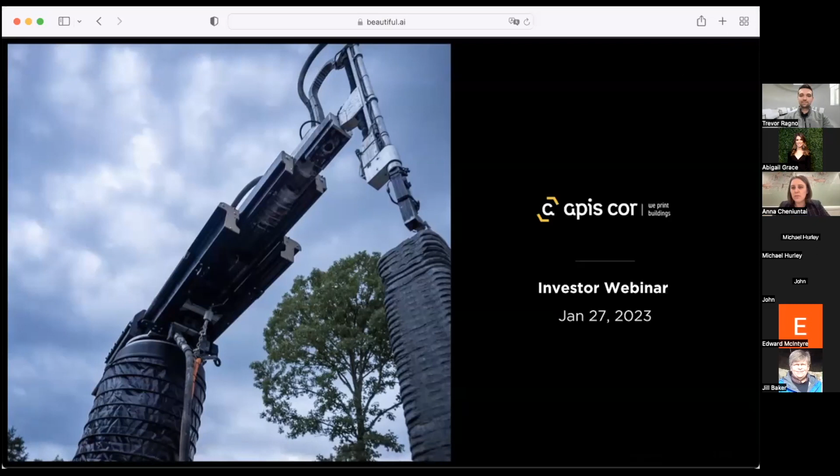So Trevor, do you see my screen? Everything is okay? Yes. Perfect.

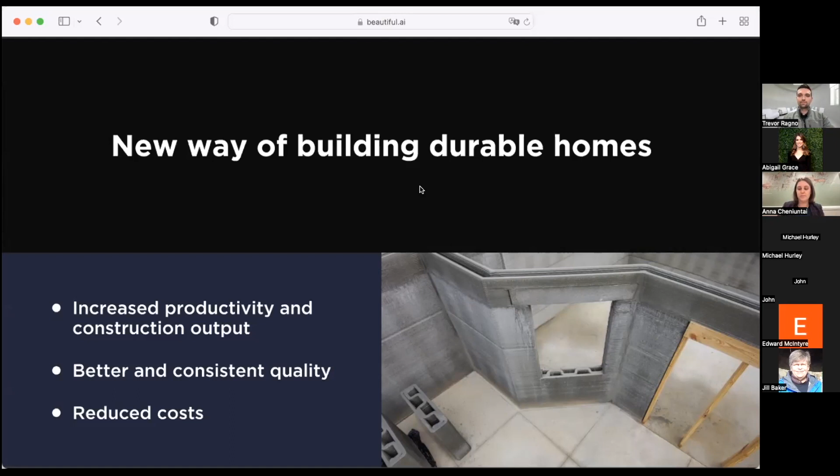So now really quickly about the robots that we have. Frank is the printer. Frank is mobile and portable and very easy to transport. And you can see that it's pretty compact. When we say compact, it's not something you can put in your purse, for example. It's really compact compared to the human size, because other companies and other printers are huge. Compared to them, we are really compact.

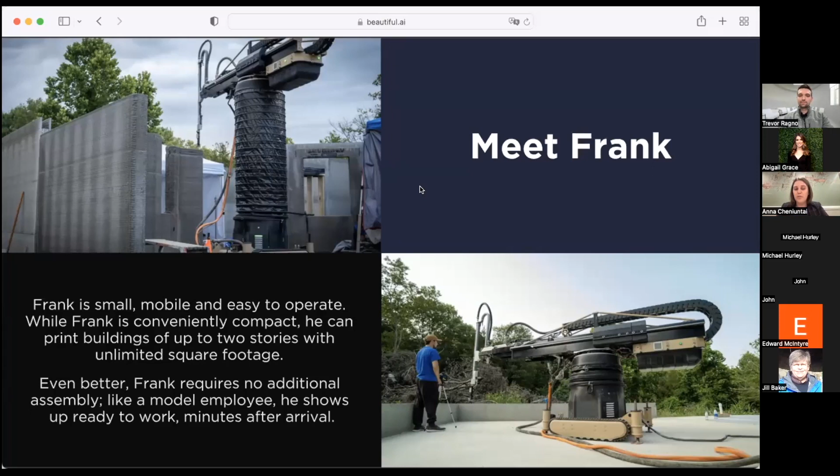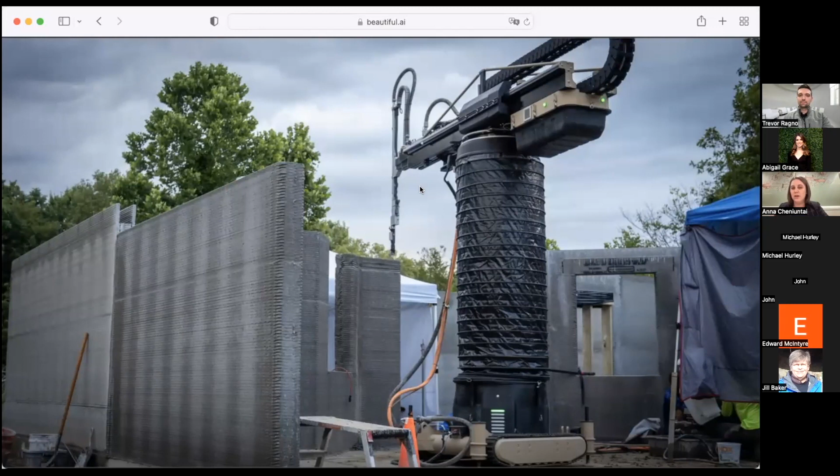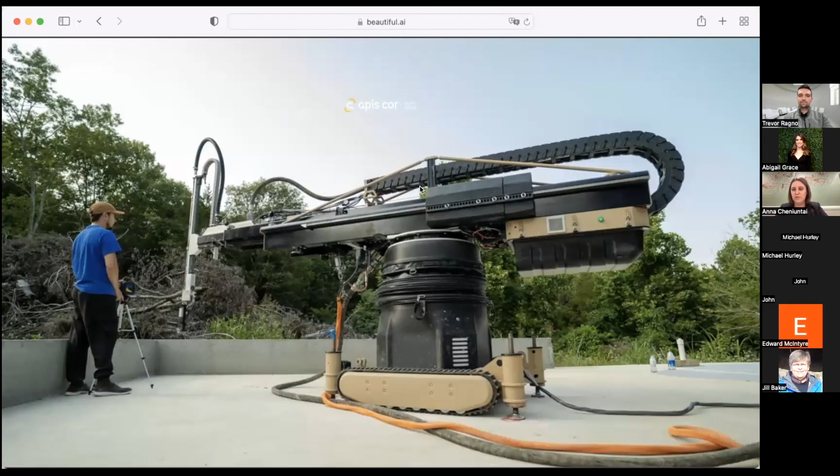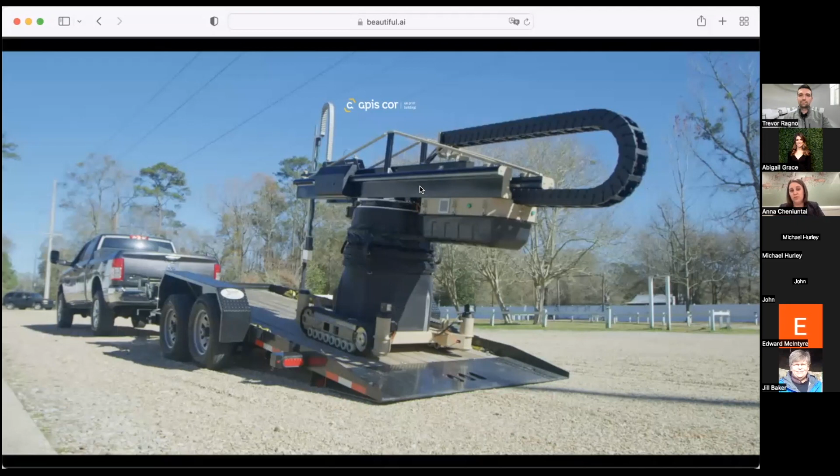Frank can print up to 2 floors. This is how you see he's finishing the walls of the first floor. You can see the quality, you can see how it lifts up. This is how it compares to the operator. It's actually Nikita Cheniuntai, the inventor, CTO and co-founder of the machine, on one of our construction projects. This is what we mean saying that it's very easy to transport. So Frank actually can fit on a flatbed trailer.

And how we can 3D print 2-story. Hypothetically, we can 3D print 3 floors, but now we have only tested 2 floors. So, for example, the same as we did in Dubai. We installed the precast slabs, and then we put the printer using a crane on the second floor, and we continued printing the walls of the second floor. However, the walls were very tall. They were 4.5 meters tall, much higher than the printer can print when stationary.

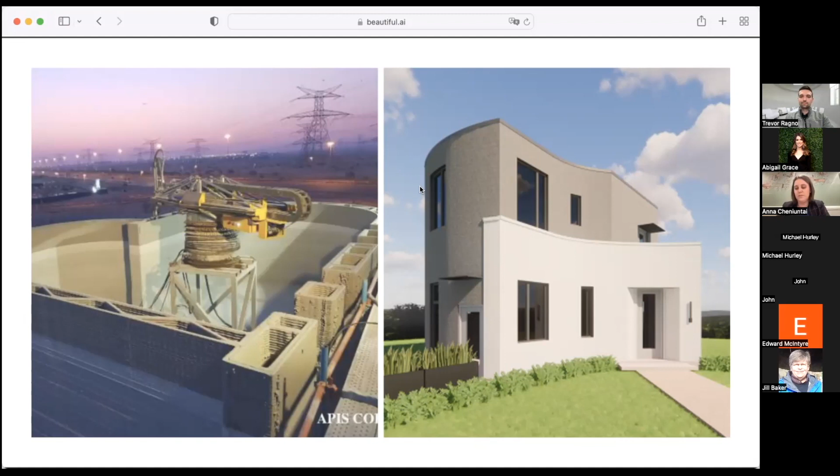So here on the left, you see that we put the printer on a very simple metal frame pedestal, and this is how we extended the printing height to 4.5 meters. And we can do the same for the house that you see on the right. As an alternative way, we 3D print the entire height using the metal frame, and then we install the wood joists as the slabs between the floors. Frank is also very compact. It's designed to go through doorways. So when you complete printing a house, Frank just drives through the doorways.

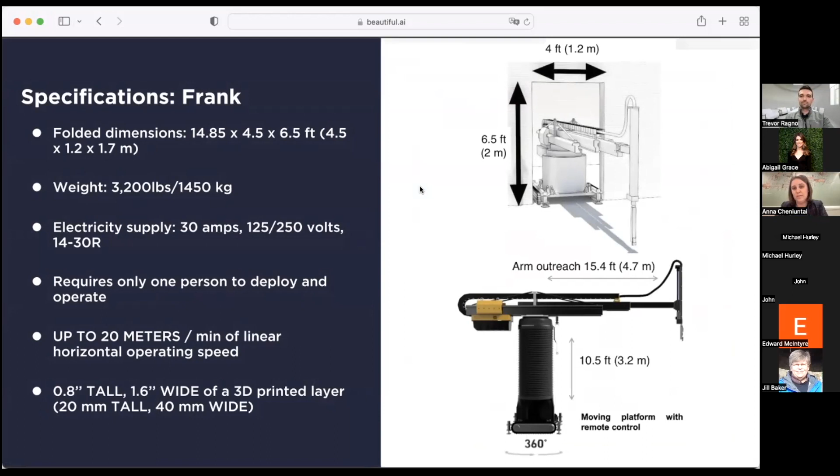About the material: the material we use, we developed it from scratch. It's a special concrete mortar that consists of about 90% cement and sand, and about 10% special components and accelerators that make the material extrudable, durable and suitable for 3D printing. And the magic, or the secret sauce, is what exact components you use and the ratio between them. It's basically the recipe of the material. We spent years to crack the code for the perfect and really advanced material. We're really proud of it.

And the quality of our material also allows us to print walls with exceptional quality. But again, all of the components that we use are not toxic, not fancy or prohibited. We use components and accelerators that are already used in the concrete industry. Again, the proprietary part is what exact components you use and how much you need in your recipe to achieve the best result and extrudability.

So now Gary is a little brother of Frank, and it's our proprietary piece of equipment. It's a mixer and pump machine that mixes the dry 3D print material with water and then sends it to Frank.

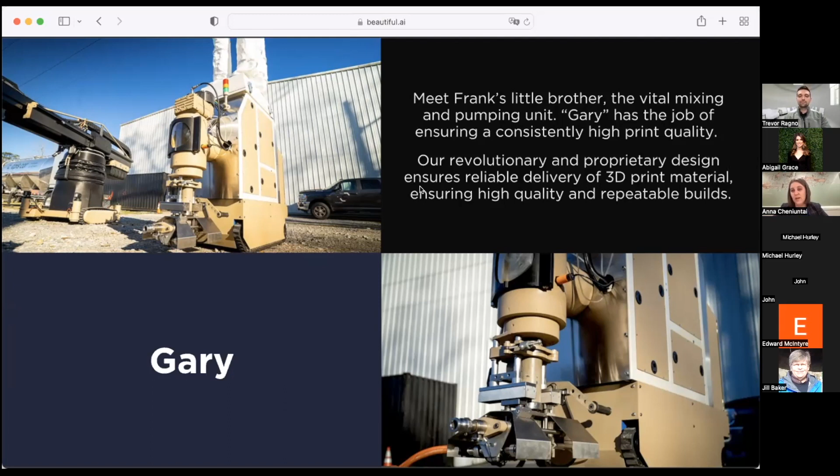Gary was designed after our experience in Dubai when we used the standard existing plastering machine. That was a nightmare. We realized that it's not the way to continue this technology. We have to create this specialized mixer machine for that, because there wasn't any solution for the 3D printing technology. Material is really sticky, and it's a different material that we use. So we had a lot of clogging, a lot of problems on the Dubai project, but we completed that project. And that experience showed us that, yes, we need to create a proprietary mixer if we want to make this technology really scalable and make our customers happier when they use it.

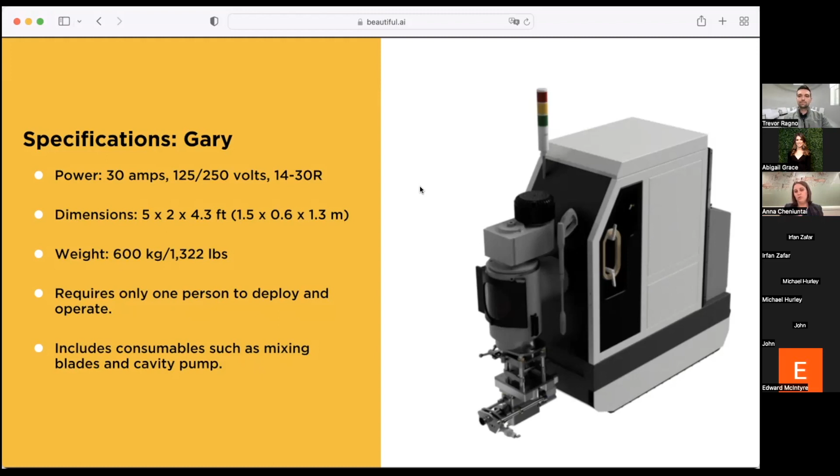And the last member of our 3D printing family is Mary. Mary is a trailer that transports the 3D print material. 3D print material is a dry mortar. It comes to the construction site in a dry form. Then you plug in all of the hoses to Gary. Gary mixes it with water and immediately sends it to the printer to extrude. Mary is a pretty standard piece of equipment. We redesigned it a little bit for our purposes. Here you see Nick, CTO and inventor again, on the way to inspect the material inside the Mary.

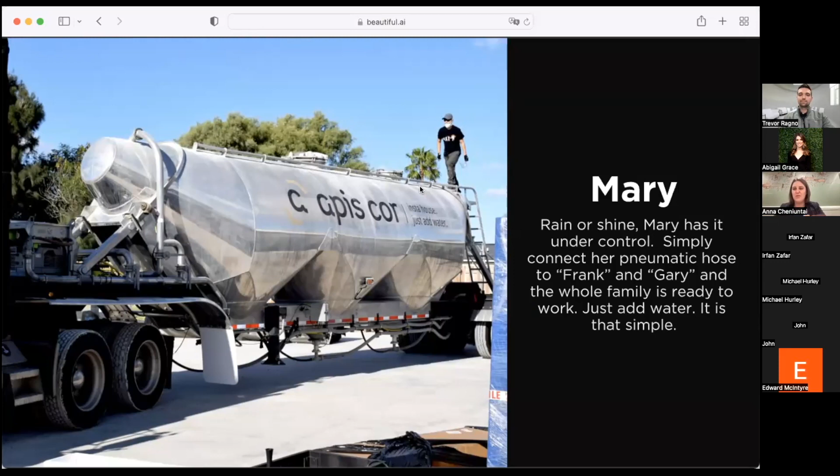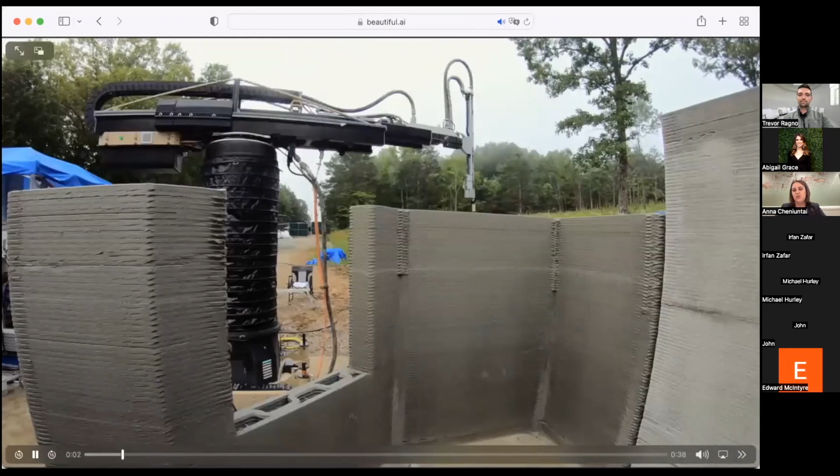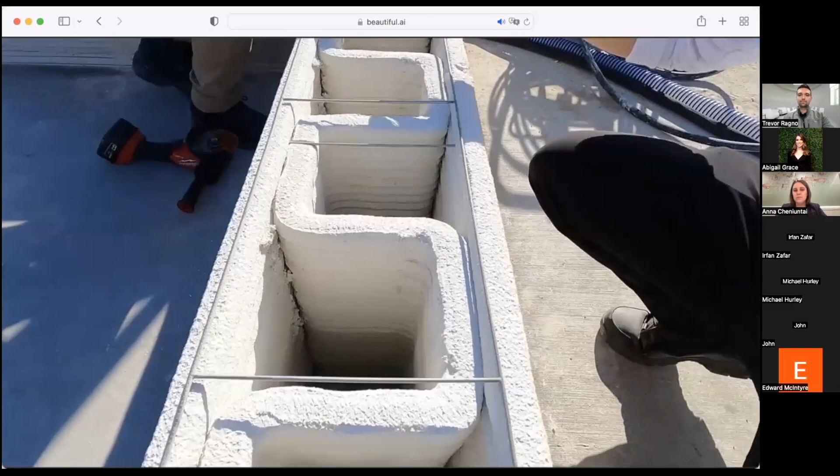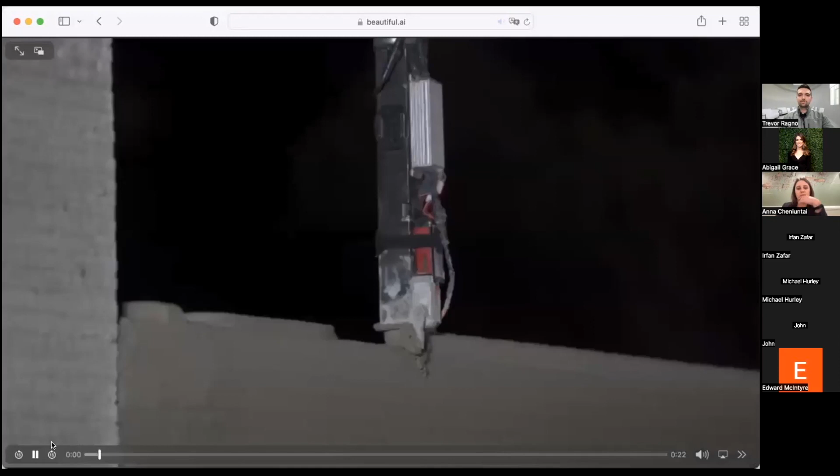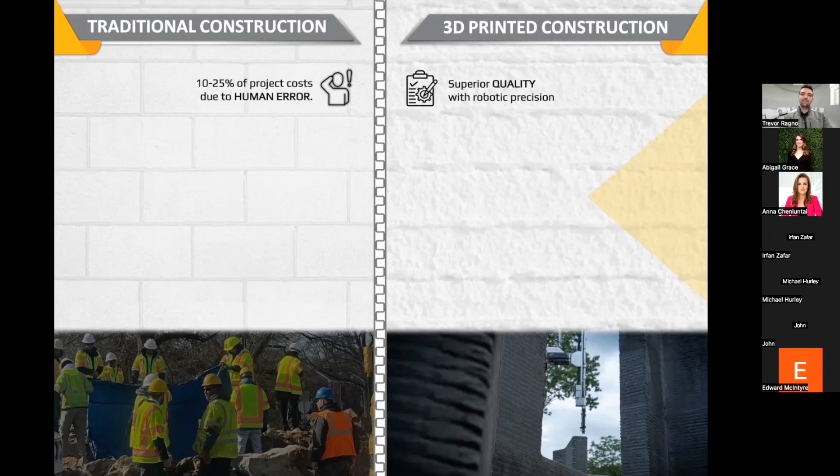Thanks, Anna. Yeah, my name is Trevor Ragno. I'm the Director of Construction and Building Technologies, and my background's really in the commercial real estate and development space. I've developed office, retail, multifamily, self-storage, even data centers. And in that process, you tend to see a lot of the common issues found on the construction site. When you compare traditional construction to 3D construction, it's really common to see human errors on the job site, and those carry costs with them: some of the materials and time spent doing work that needs to be replaced. And with a robot, you really are able to follow the plans to a T. That level of quality really helps reduce human error and the unforeseen costs that might happen on the job site.

Also, you see wood homes all over the place, but as somebody who is building or selling a house to someone, you really want to make sure it can withstand the test of time. And when you're building with materials that are flammable and very prone to moisture infiltration, mold, mildew, rotting, and even things like termites, those homes are not really built to last for generations. It's not like concrete, which is fire resistant, moisture resistant, and also really, really strong. These are all great things in a place like Florida, where our company's based, where we have things like hurricanes and big flood events.

Also, in the construction industry, you always hear about delays. Anna mentioned earlier that the average home right now, U.S. Census Bureau says it takes about 7.3 months to build a typical residential house. If that's a custom home, it's up a little over a year, 12.3 months. Right now, the median delay that's seen on these construction sites is a little over 200 days.

Now, one, a 3D printer is obviously much faster than a typical block crew, but also, and just as importantly, before you ever make it out to the construction site, you know down to the minute how long that printer is going to have to run to complete the walls of the home. So that allows you to not only act more quickly, but also have a little better control over the scheduling process.

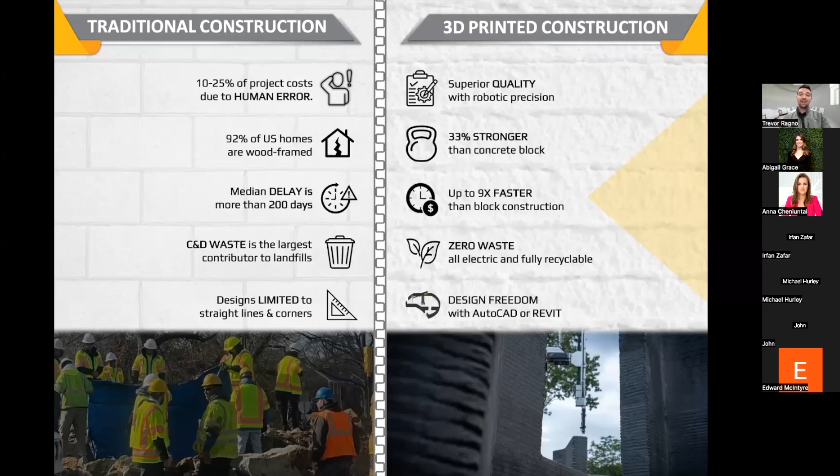It's normally much more expensive to build, let's say, a curved wall. But with a printer, it costs just as much as building a straight wall with hard corners. In fact, it might even be a little bit more affordable because you're literally cutting the corner. So now that we've covered the bases on why 3D printed construction in the first place, let me show you a little bit of Frank here.

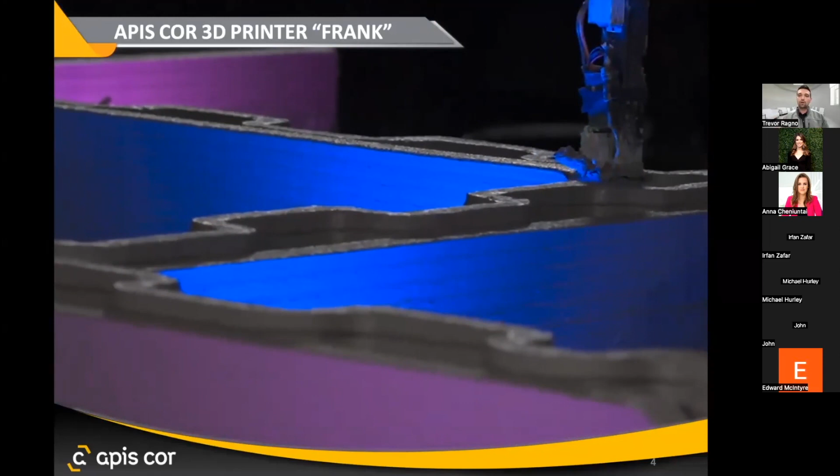I know Anna covered this pretty well, and we talk about these nice sweeping corners, but we can also make very precise and sharp corners with this machine, thanks to this smoothing spatula we have on the outside. We've talked about printing buildings in multiple sections, and being able to do that with good, smooth, consistent quality, there's really a lot of advantages to that we'll touch on in just a minute.

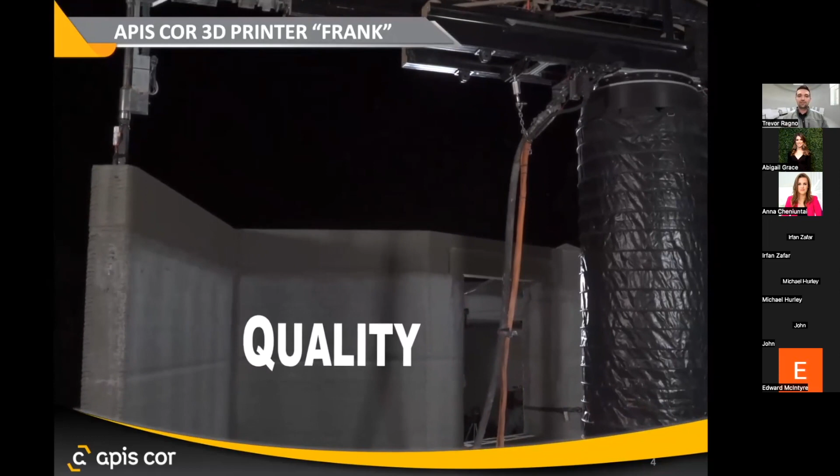So between the different types of printers out there, there's robotic arms and a few others, but the biggest category of printer that you see, besides the Apis Cor printer, are these gantry printers. If you aren't familiar, they're essentially like a CNC machine that's just scaled up, or like a desktop printer that's normally used for plastic, but put on steroids and made absolutely massive.

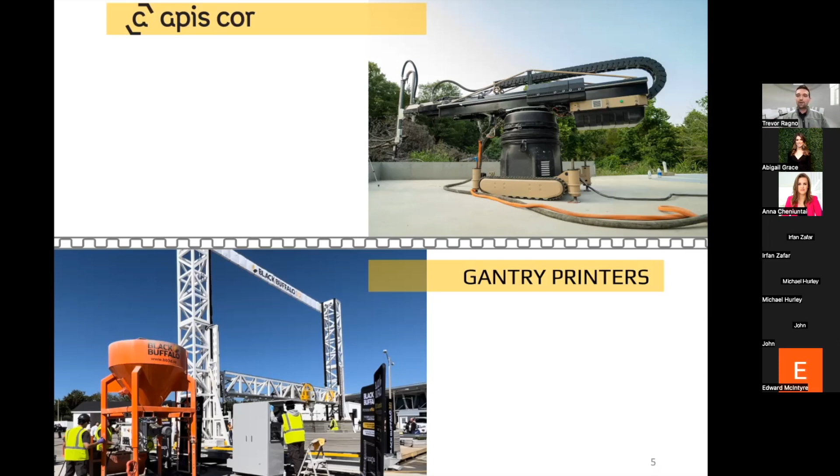Now, these printers are common in the industry, but there are some drawbacks to using them. One of which is pretty obvious. Anna touched on it earlier, that these printers are massive, so they take really big equipment to transport. Oftentimes, one or even multiple semi-trucks. I believe the last printer that was just shown there takes 3 different semi-truck loads to deliver.

However, with the Apis Cor printer, if you have a pickup truck like most contractors do, and a trailer like most contractors do, then you can already take the printer, the mixer, and all the equipment you need to start printing out on site. And that's something that really helps with affordability on the front end.

Once you get to the site, a lot of these larger gantry printers require heavy equipment to assemble. These are things like construction cranes and telescopic forklifts that, of course, cost money to rent and take up space out on the site, but it also adds a significant amount of time from when you arrive on site to when you can begin printing and ultimately deliver the home.

It could be a few days or it could be a few weeks, but you're not going to see a gantry printer that can be set up by a single person with no additional equipment and no assembly required. And that's exactly what we've designed the Apis Cor, the printer Frank, the mixer Gary, this whole combination to really do.

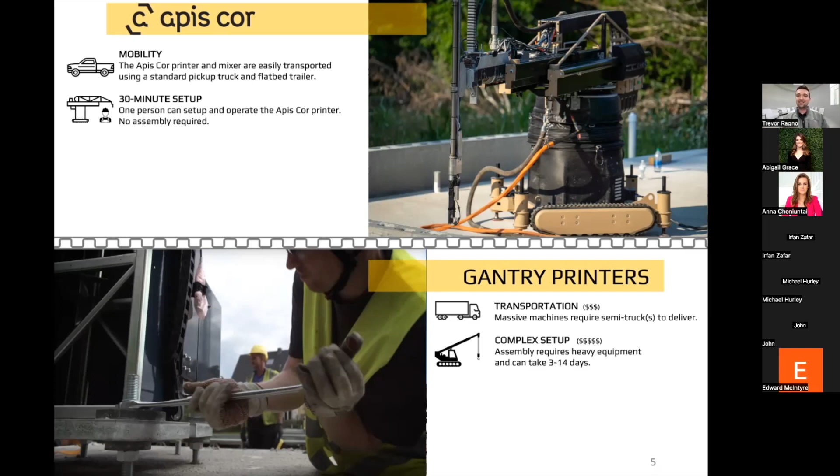Now, operation. So once you get rolling out there on site, you'll notice when you look at some of these other printers and some pictures or images of them operating out on site, that there's sometimes larger crews associated with them. There might be a crew that's monitoring the printing and the mixing and the finishing. And well, the whole idea of 3D printing is to help reduce our reliance on construction labor, because there's such a massive shortage right now.

It's so hard to find construction labor, but there's still so many houses that are needed. So if you're trying to fill that gap, adding just as many people or more to the site with one of these gantry printers, it's not really helping to solve the problem. That's why we have a printer and a mixer and even material delivery like a bulk truck that are all working in harmony. They're all communicating with each other.

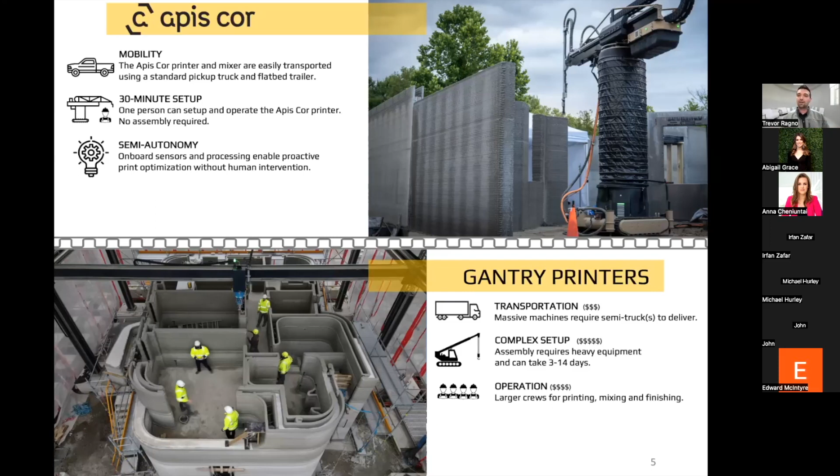That way, the operator doesn't really have to do very much, and we can reduce the number of operators that are there. It kind of frees them up to do other more productive things on site that we'll talk about again in a minute. And one big advantage here is the scale. So if you're printing with a gantry printer, you can only print inside the box. So a bigger home means a bigger printer.

And there's not really an ability to print in multiple sections by moving that large gantry printer, simply because the mechanics wouldn't allow that large boom to get right up against a neighboring home or a neighboring print section. But our printers are specifically designed to print buildings of unlimited scale. There's essentially no limit to the size of the building you can create, except for maybe the size of the plot of land that you're building on.

And that's one big reason why we were able to print the largest 3D printed building on Earth. This building in the back, I know Anna mentioned 9.5 meters earlier. That's about 31 feet tall. It's about 7,000 square feet. And although it is only 2 stories, at 31 feet, that's around as tall as you'd see walls for a 3-story home here in America. Again, we've not printed a 3-story building just yet, but at least in this use case, you can see we have tested up to 31 feet in print height there.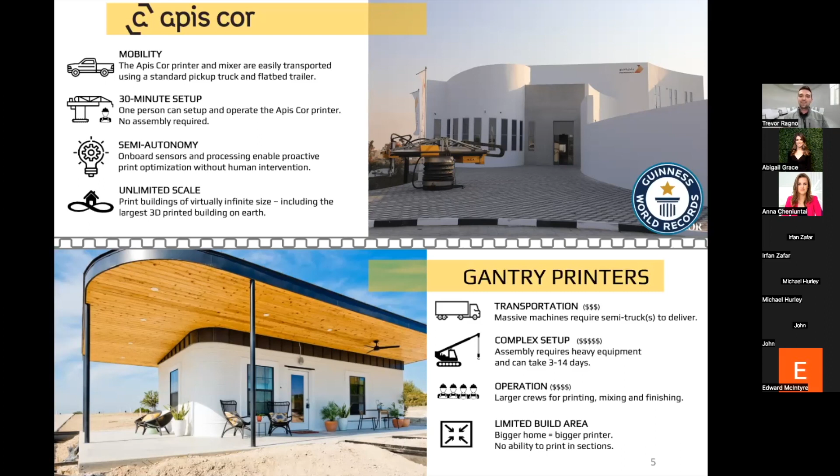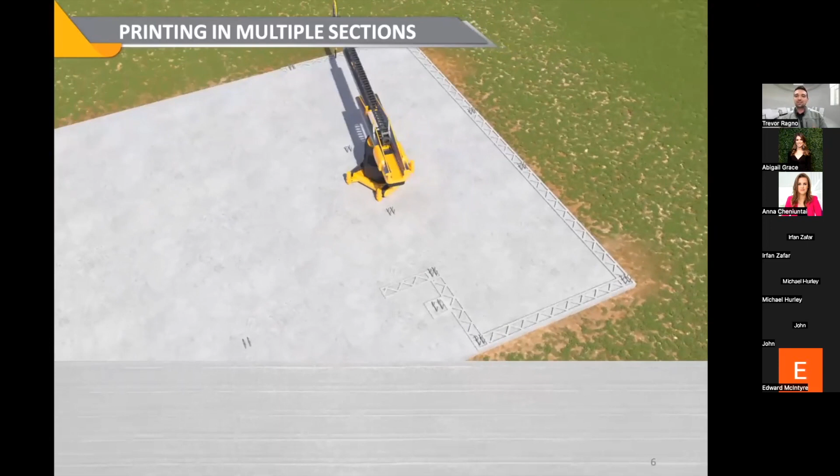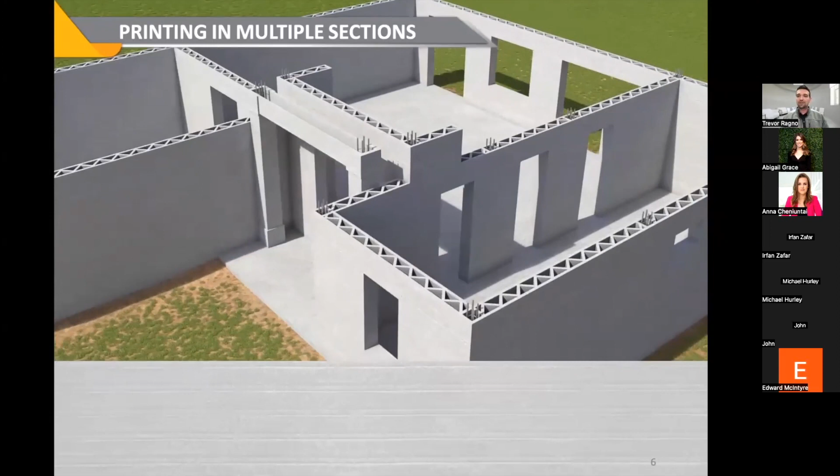But printing in multiple sections is really, really important. And this is going to help explain that just a little bit. So the printer's moving into section 1 and will move over to section 2. And as it begins printing, you can see there's kind of a joint between these two sections where they're coming together. This is something that is actually required with typical, let's say, concrete masonry construction, concrete block home. You can see the home kind of being finished out here.

Those joints are called control joints or abutments or building movement joints. Essentially, they're designed to prevent cracking. And again, they're required by building code. Normally, a masonry crew builds the block wall, then they get a cement saw and they cut those control joints in. But by strategically planning our designs here, we're able to just automatically incorporate those control joints.

Another thing you might notice is that you're able to do a lot more when you're printing in multiple sections. Let's say the printer just finished up section 1 and it's starting to print section 2. Well, now as an operator, you're able to start cutting in outlets in section 1 and adding insulation and adding reinforcement and roughing in holes for plumbing and a whole list of things that normally you'd require a different crew to do or would be done after the masonry crew left.

So all of these, electrical rough-in, plumbing rough-in, insulation, window rough-in, all these things can now be done by fewer people and fewer crews and really all at the same time while printing's occurring. So it's not that you're necessarily needing to reinvent the entire home to print these buildings and save time. You're essentially doing the same thing, but through the efficiencies that this kind of equipment brings to you, you're able to shorten the overall construction time and also help save money in that process.

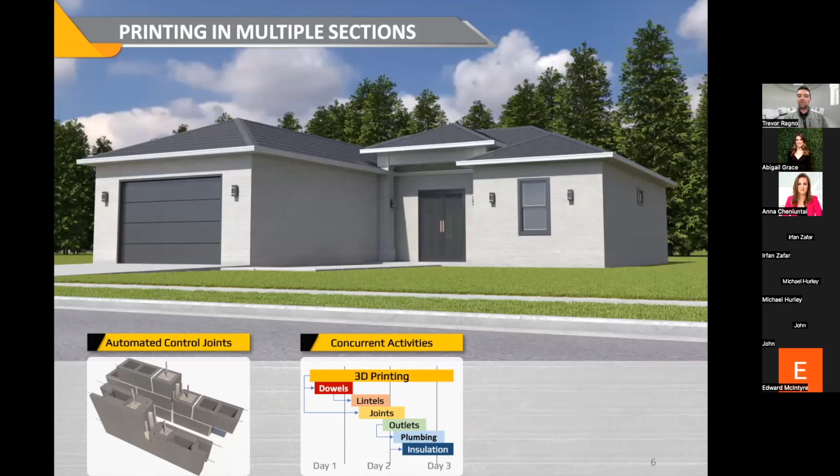Another thing that's interesting about this is that since we essentially are printing in these multiple sections, you're able to also have multiple printers operating at the same time in the same place.

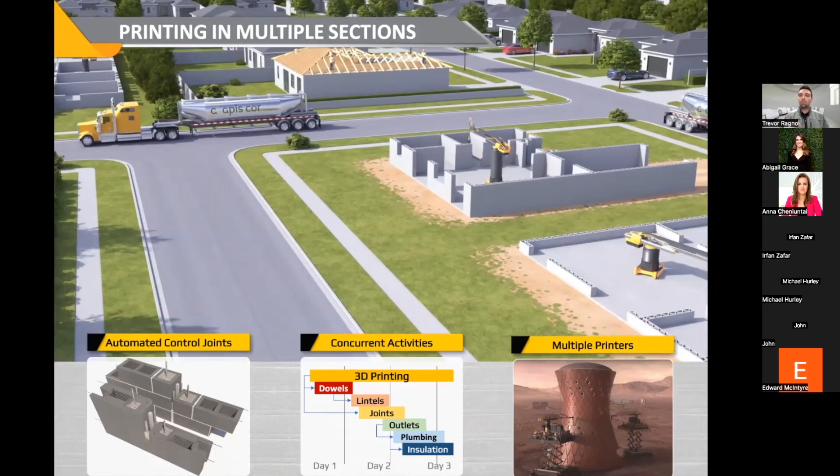So for example, you can see these 2 printers operating to build that same home at the same time over in the top left. Or over here in the bottom right, you can see multiple printers, all, let's say, owned by the same builder, who are building multiple homes kind of side by side next to each other. This is just another thing that lends itself to what Anna was talking about earlier with scalability and being able to grow your business by having, instead of 1 printer, 2 or 3 printers and being able to significantly ramp up your production and delivery of homes as a builder.

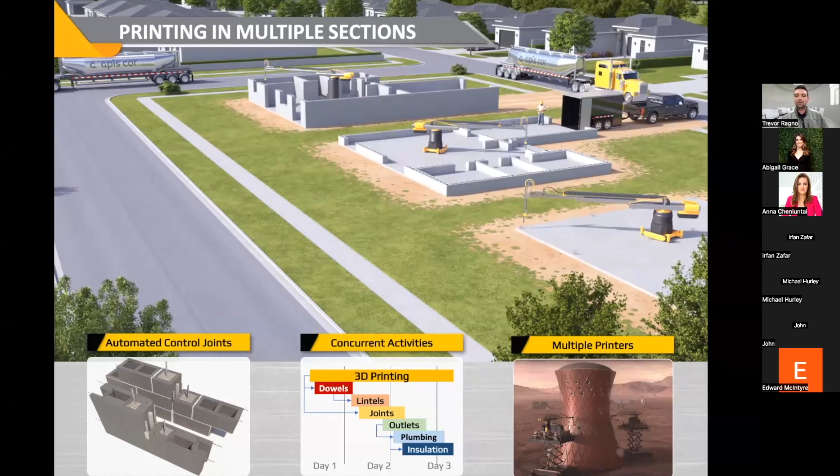So we have kind of taken a different approach than any other construction 3D printing company in terms of what we're actually printing, the walls themselves. A lot of companies try to differentiate themselves by the print pattern that they're making, but the unintended consequence of that is that it's really unfamiliar. How do you design for that? How do I install a window? How do I attach a roof? How do I do all of these things? Because it all seems to be new.

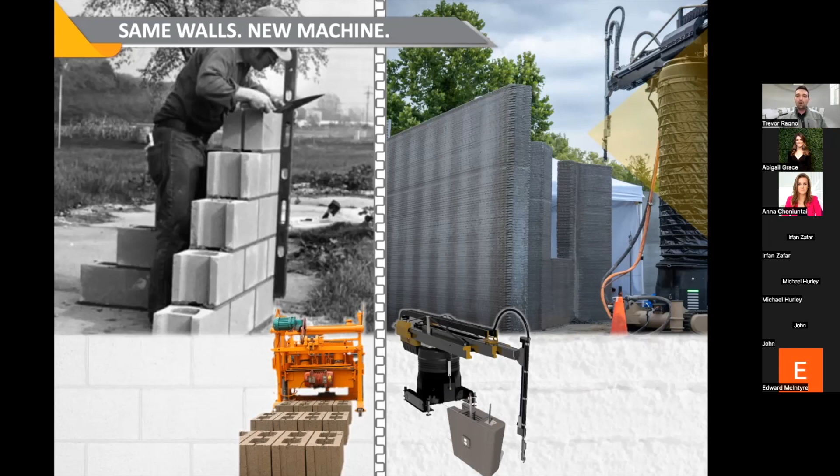But, in our opinion, the concrete block wall, it's really a gold standard of construction. So why reinvent the wall when you can make the same great homes that have been being made and that everybody already knows, but just do that faster and more efficiently and more accurately. So when we think about it, these concrete blocks have been made by machines, just like our 3D printed walls. But those concrete blocks are made by a machine, a factory, and then manually assembled out on the construction site. We make the same concrete block walls fully assembled right on the construction site. And of course, it comes with those benefits that we spoke about earlier.

So when it comes to permitting, this was before I really got involved with Apis Cor and saw how the permitting process looks when you're getting a building through approval. I expected there to be a lot more hurdles to go through, but surprisingly, we've done this in multiple states across the country. We made the first commercially permitted 3D printed building in America. And because we copy concrete block construction, what we've noticed is that it just makes a lot of sense to the architects, the engineers, and people at local code enforcement and building departments.

So, for example, here on the left side, you can see these two walls. I know they look similar, but on the left side, we have a standard concrete block wall, and on the right side, we have a 3D printed wall. Now, at first glance, you can see that these are very similar, if not really identical. When you're thinking about, okay, well, how do I attach this wall to the foundation? Well, with a concrete block wall, you have these vertical dowels that go into the slab and connect in. And you have the exact same thing here. You have reinforcement in the wall. The spacing of that reinforcement's the same. The grout you use in the cavities, the ladder wire, the bond beams, how you connect to the roof. Really everything is identical to how you would do this with a concrete block home.

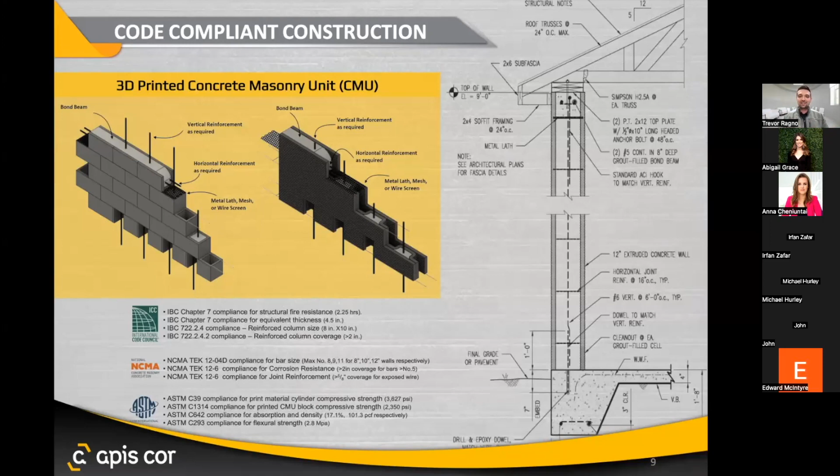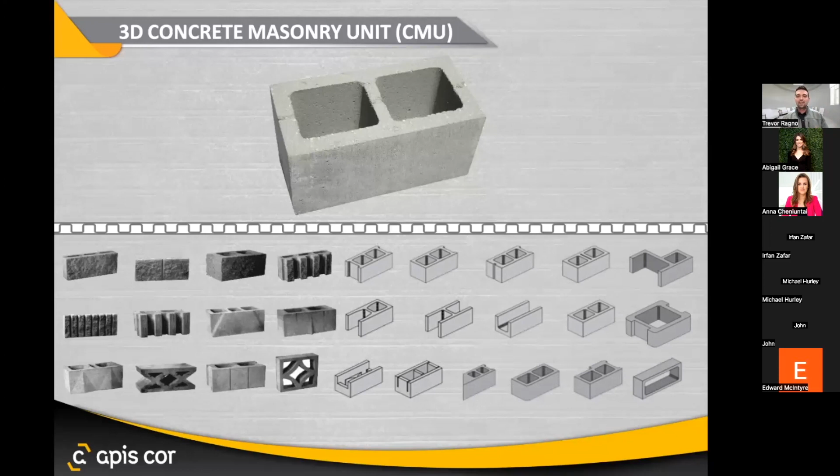So I know copying a concrete block may be the only way to make 3D printing sound boring, but in reality, I know everybody thinks of this block on screen as a concrete block. That's typically what we see. However, there's actually a lot of different types of standard concrete blocks used in the industry. So by copying concrete block building code, we're able to mimic not just the concrete block that you see up here, but a whole list of other concrete blocks, only a fraction of which you see on the page here.

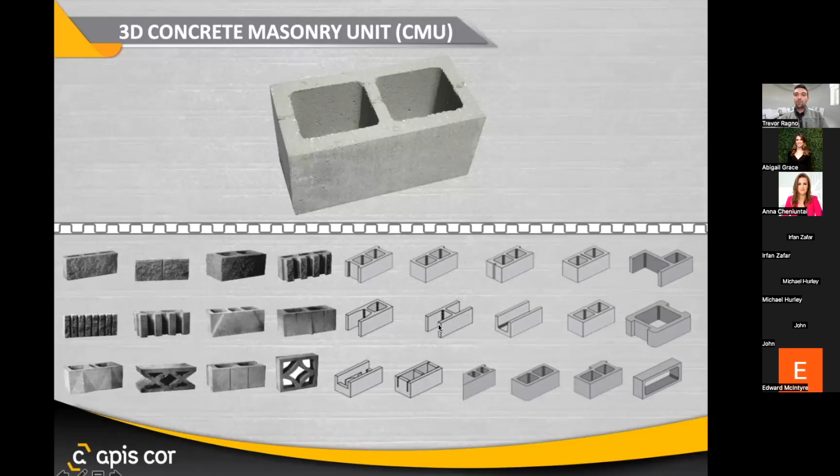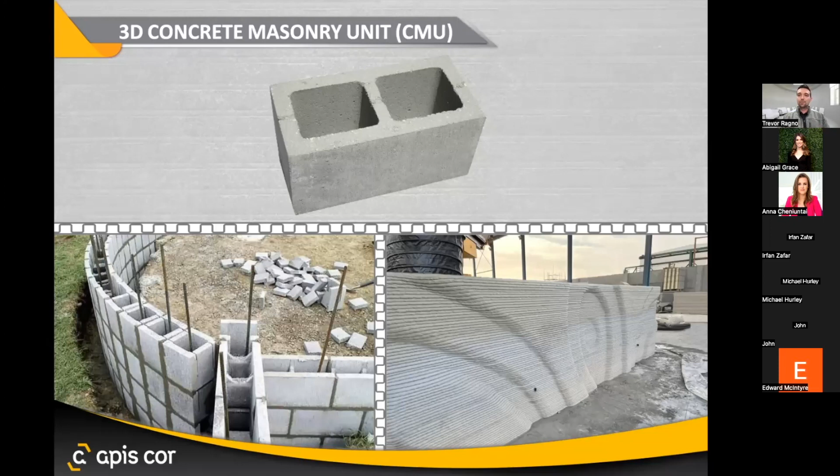So by copying that standard concrete block design, we're able to make design easier, make permitting easier. And then when you're doing that secondary construction, those tradespeople don't really need to be re-educated. It's very simple to do something like installing a window because it's really identical. This is what we talk about when we're saying secondary construction. It might be the reinforcement or the insulation or a roof, windows, doors, mechanical, electrical, plumbing. All of these other things are done identically.

So it's very easy to understand how these two things are not just from a design perspective and a code perspective, they're all governed by the same concrete block building code and designed in the same way. But those secondary trades, you aren't needing to retrain people. You can still use the same contractors that you've known for years if you're a builder, without having to go through the headache of retraining and learning all of these things.

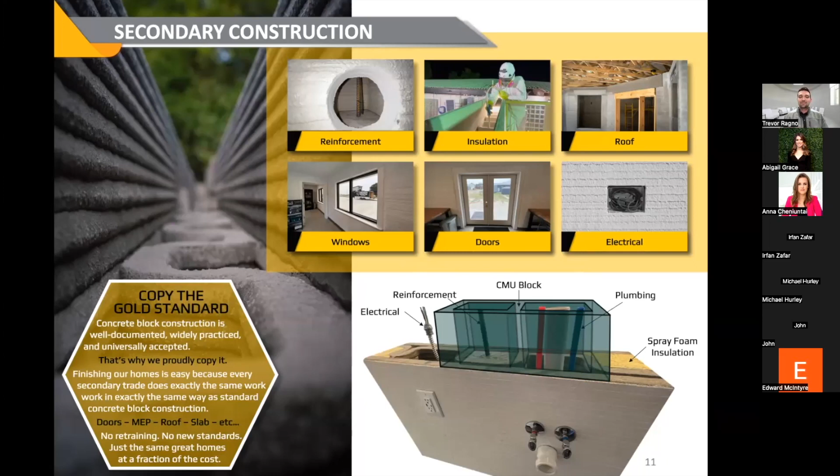In most cases, there's questions, and everybody has these questions, and it makes sense. If you think, how would I attach a roof? The default answer is essentially in the exact same way that you would for a concrete block home in the same area. Or how often do I need to reinforce it? Well, in parts of Florida, it might be 2 feet on center, and other parts might be 3 feet on center for concrete block. Well, you do the exact same thing in the same area for a standard 3D printed block home. All of these things we also talk about in our online courses.

But people kind of also wonder on the design side from the architecture, if you want to make something really cool, what do those design tools look like? Well, we've also developed some really cool plugins for the most popular softwares used by architects. These are AutoCAD and Revit primarily. This allows you to just take a standard floor plan and in a matter of minutes, very easily convert this to G-code. Now, Frank, he doesn't speak English because, well, Frank's a robot. He speaks geometric code or G-code.

And this is how we're able to ensure that before we ever go out into the field, we know how long the print's going to take, we know how much material is going to be used, and we can verify that the actual G-code that we're using out there is going to work really well the first time.

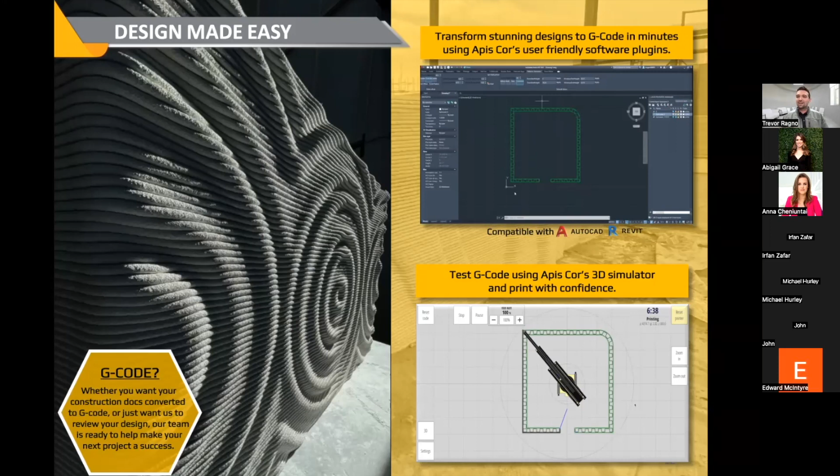Thanks so much. Oh, yeah, I actually have been answering a lot of questions in the chat. So I think one of the questions that it's better for you to explain in more detail is how our 3D printed houses can be resistant to hurricanes and earthquakes, specifically in Florida. So that was the question that I think you'd better address.

Yeah, that's a really great question. Hurricanes and the flooding that comes along with them. Flooding is the #1 cause of property damage and one of the most destructive forces Mother Nature throws at us. Thankfully, the concrete block homes that are being built in Florida and all throughout the Southeast are here to help cope with that. And by copying this concrete block construction, we're able to show and meet those exact same performance criteria and standards.

So in that NFPA document, we might be able to post a link to it in the chat here. If you just Google Apis Cor NFPA, you can see a lot of the testing results for things like this. And just like concrete block homes, which are resistant to Category 5 hurricanes, these 3D printed walls are also resistant to the same winds and water as another concrete block home.

So our business model is we sell or lease out the equipment to construction companies. We also supply and sell our 3D print material, or we're also going to work with authorized producers and manufacturers of 3D print material. This is to increase scalability and also offer a variety of options for the material. But 3D print material has to be authorized by us to make sure that the equipment is going to work correctly and there's not going to be any damage to the equipment.

Because the 3D print material is a big part of the successful product and successful use of the equipment. Wrong material can easily damage the equipment, all of the hoses, or the resulting 3D printed walls will be very ugly. So if you don't want to have that, it's better to talk to us first about what material you want to use, and we will check if it works or not. However, you still will be able to use the material you want. This is applicable for the customers who are going to purchase the equipment this year.

We also make money on construction technologies because we are a construction technology company. And we already have a lot of technologies related to value engineering, such as insulation, everything that Trevor just covered. And we also already have the roadmap for technological development for secondary construction, how to improve the installation of the roof, of windows, of everything. So again, we think about construction as a process as a whole, not just that we created a fancy technology to extrude concrete sausages. No, it's not about us. We really think about the big picture and how to really rethink construction.

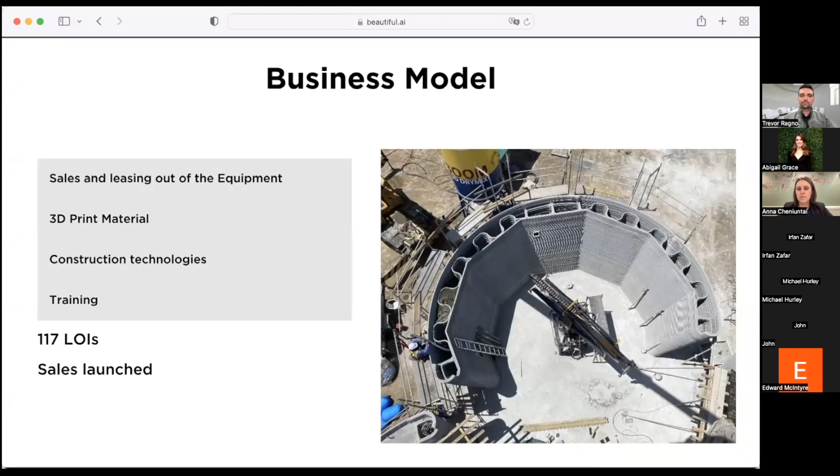And again, our plan, where we want to be in 5 years, by 2027, is to have at least 400 printers in operation. And those 400 printers will be able to extrude the amount of material to 3D print about 20,000 houses. So this is also a pretty conservative plan. Of course, we don't set it as a bar or a limit for us, but this is something that we believe we can achieve, and this is where we want to be in 2027. But of course, we're always trying to exceed our plans and expectations.

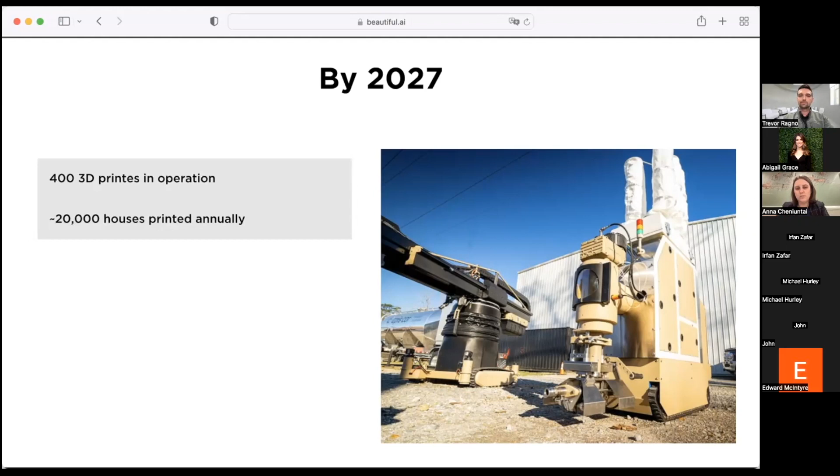And plans for this year, 2023. So this year is very, very important for us and really critical, because this is the time when we're going to build at least eight pilot projects with our early adopters. Early adopters are the construction companies who are already talking to us to purchase the machine or want to purchase the machine after we do the pilot project with them. And they also invested in our company, or they have been with us for a really long time. So we qualified them for a pretty long time, so we feel confident having them as our early adopters.

So these are the projects that we're going to 3D print. The first project is going to be our model house in Melbourne, Florida. Hopefully, if everything goes according to the plan, we will be able to start printing in May, maybe June. And for the model house, the investors on Start Engine who are eligible, who invested the specific amount of money, will be able to come and see the live printing of a house or stay for a couple of nights in the 3D printed house.

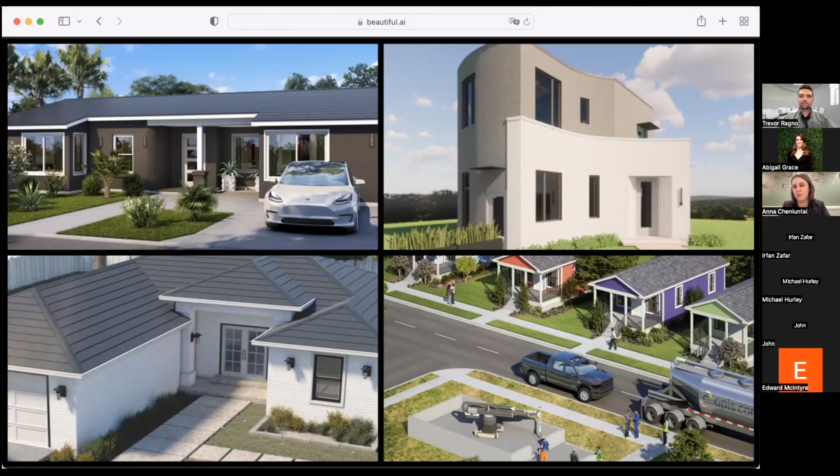And as of today, we're going to have pilot projects in Florida, Louisiana, Alabama, Georgia, Texas, Waco, and maybe Austin, we're still in the discussion, California and Montana. So this is really, again, an exciting time, but at the same time, very critical. And it requires a lot of hard work for us to achieve this year. And if we achieve this year, 2024 is going to be the year when we achieve what we want, right? Having all of the customers with our 3D printers and having them provide 3D printing services.

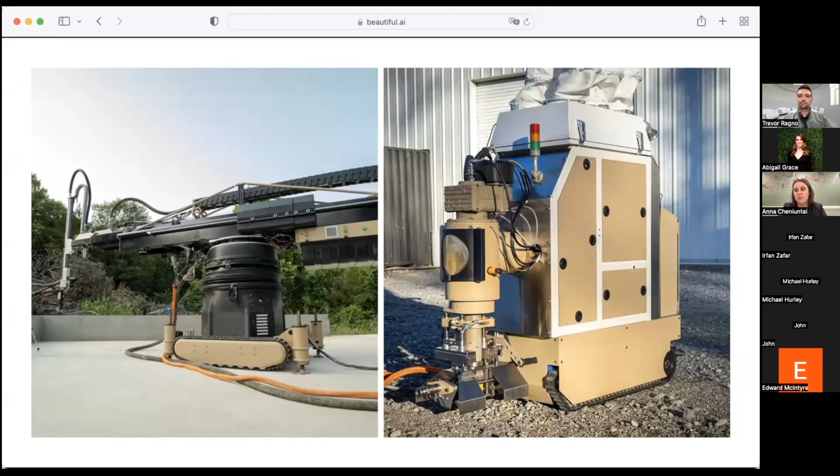So now about the sales. As I said, we already started sales of the equipment. Really happy about that. And if you want to learn more about the pricing and become a customer and purchase the equipment, please contact Milton Kobus. He is our director of sales, and he will be happy to walk you through the process.

So now quickly about Start Engine. Start Engine is the platform for equity crowdfunding qualified by the SEC. Right now we raise money only through them, and we already have 509 investors, at least as of 2 hours ago. It's changing all the time. And we also have 250 investors from the Regulation A+ we did before Start Engine. So as of today, we have almost 800 people who joined us as investors. We're really, really happy about that. Thank you very much for being with us and believing in what we do and believing in our vision; it really means a lot to us.

About the investor perks, depending on the size of the check, you can receive free access to online courses. You can visit the live printing of a house. You can stay in a 3D printed house. You also can have a Q&A session with Trevor Ragno. So please read all of the details about that on Start Engine. And if you're an existing investor, just reach out to Abigail and we will double check what we can do for you.